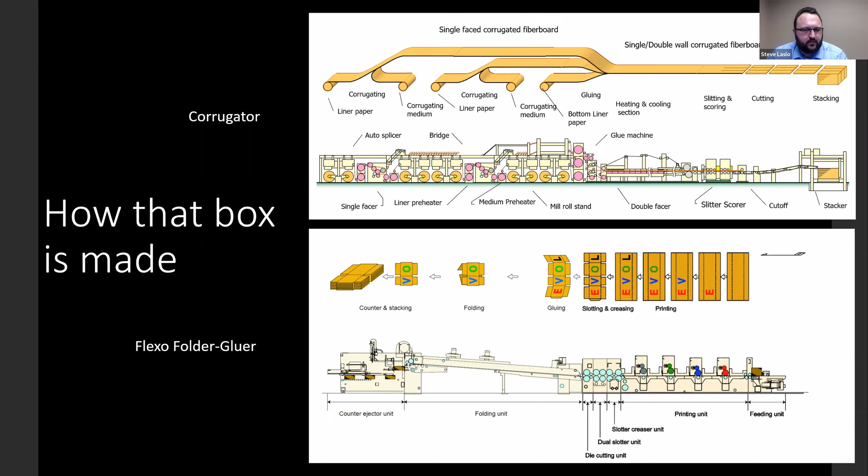So why augmented reality? I guess we got our start working with augmented reality around 2018, I would say, and that was around the time Pokemon Go was very popular. A lot of people in the AR community have probably heard of that. But with the popularity of that, a lot of people started looking at what you could use that same technology for in an industrial environment. So that was kind of where we got our start.

The way that we looked at it differently, perhaps than some others, is we wanted to use it as both an internal and an external resource, and offer that as kind of a product to our customers so that they could benefit from the same kind of internal training resources that we develop to train our team.

Some of the challenges we're thinking about when developing this program: obviously on-the-job training is very expensive and time-consuming. That used to be our primary form of training our field service technicians, and we're in a transition point now where we're trying to use this new technology to help leverage training tools to bring them up to speed a little bit faster and use a little less on-the-job training.

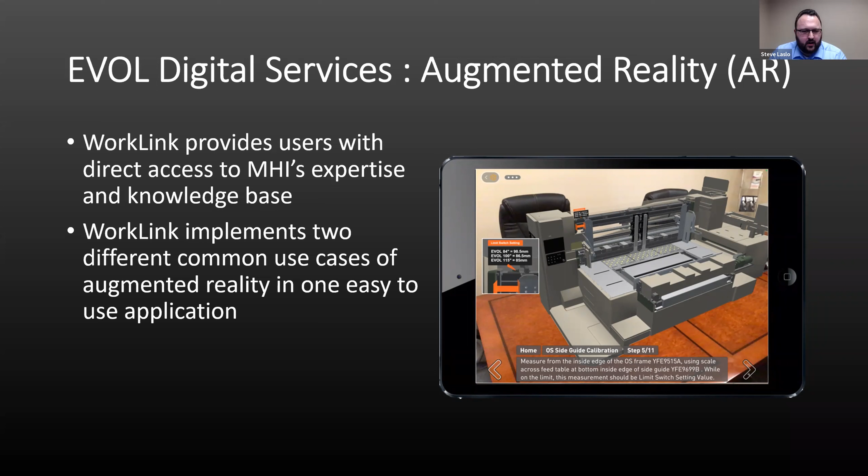Next slide, please. On that WorkLink platform, our customers and field service guys get access to a wide database of expertise and knowledge. It implements the two most popular use cases of augmented reality within the same application: the remote connection, like an augmented reality enhanced FaceTime call sort of functionality, along with the 3D model AR representation of animated procedures.

Next slide. So the remote assist functionality is really important for us because it gives us direct contact with the on-site user, and it shares audio and video and allows us to annotate our instructions to them.

Something you learn if you're at all in customer service in a technical capacity is who you're dealing with over the phone. They may call something a different term than you're used to calling it. There's oftentimes a bit of a communication barrier. So any tools we have that can get us past that difficulty and make it more clear what problem you're experiencing and what checkpoints we should be taking into account right now are valuable. Explaining that visually is much easier than trying to describe to somebody, go to the cabinet on the other side of the machine, look for the red blinking light.

So that's a little bit of background on why we really appreciate the remote assist functionality. Next.

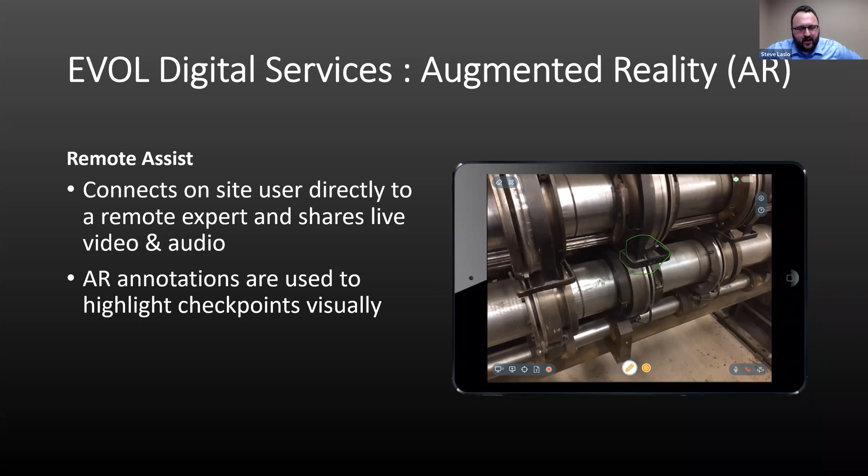As far as work instructions, that's what I think is really the most flashy and impressive part of this. As we continued developing the program, we managed to get the 3D models. When we actually started, we didn't even have the 3D model of our equipment. But as we started to show some signs of success, we were able to farm out some of the older 2D CAD models and have them converted into 3D models so we could import that into the platform and start developing reference materials and step-by-step procedures. The nice thing is it doesn't just explain how to perform a task, it actually animates those instructions, and it really helps the user better understand a much more complicated process if they can see it happening.

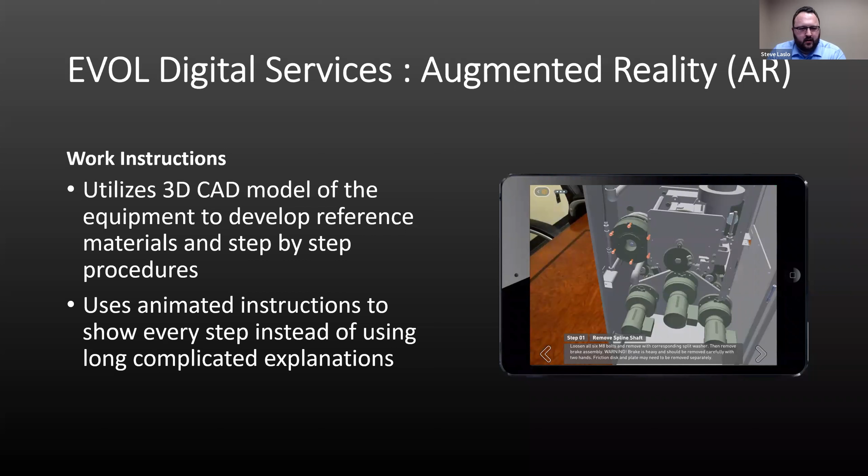So what we first started building is all the limit adjustment procedures and the gap calibration, because those are not particularly difficult to animate. We're not talking about a whole lot of different parts that have to move. We're basically taking previously existing procedures that we had in PDF form and converting them into an AR format, just so we can get them out there and at people's fingertips easily.

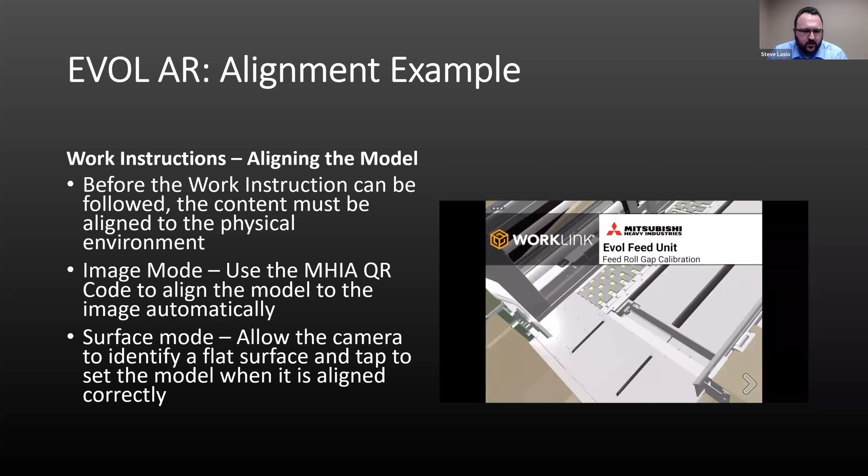First thing they'll do is align the model, and within that you have two different ways of doing that: an image mode and a surface mode. The first part here is going to show image mode, where you have a QR code that automatically places the model. This is the feed unit of our machine. Once you've placed that model, you can follow the instructions and walk around it. Surface mode basically allows the camera to identify the surface and then set the model on that surface once it identifies a flat place for it to position itself. Then you tap the screen to confirm it.

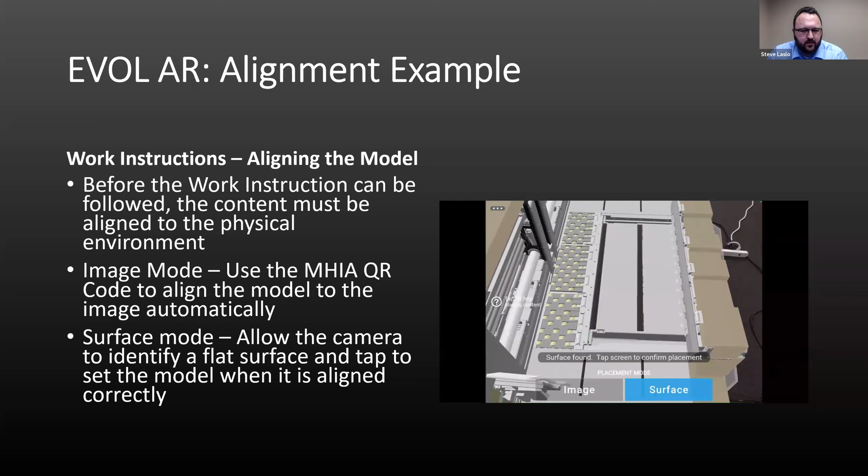So again, what we're doing here is using a smaller scale model of our machine. We focused initially on a classroom training kind of environment. A lot of the newer functionality with augmented reality allows you to use the instructions on the actual equipment in person, but we were a little concerned going into it that there might be potential safety concerns with our customers. We weren't sure, with this being a new technology, how well it would be adopted yet. So we wanted to start with building a classroom training kind of environment tool that can be used.

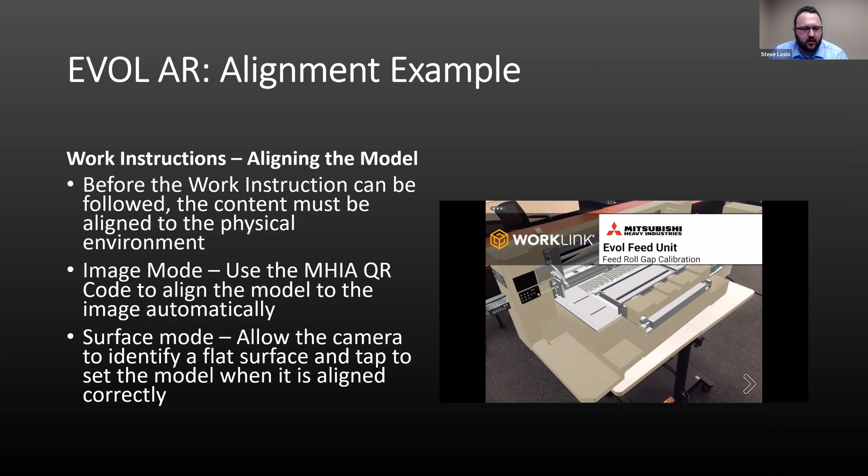Next. I think that's the same slide, sorry.

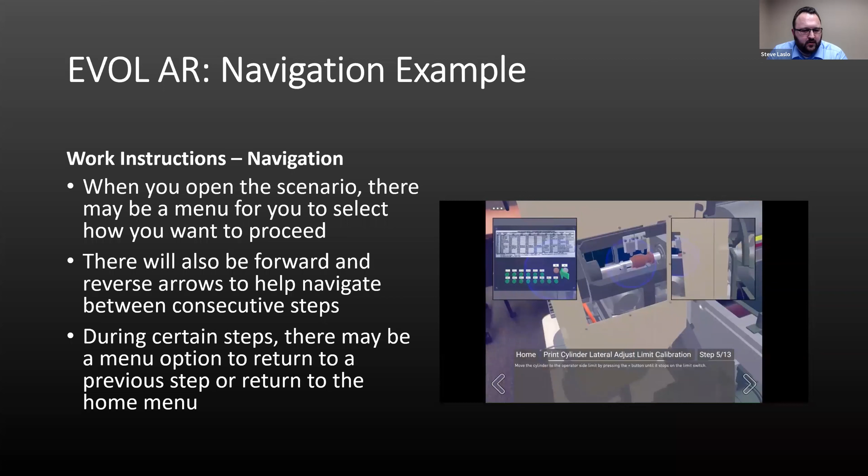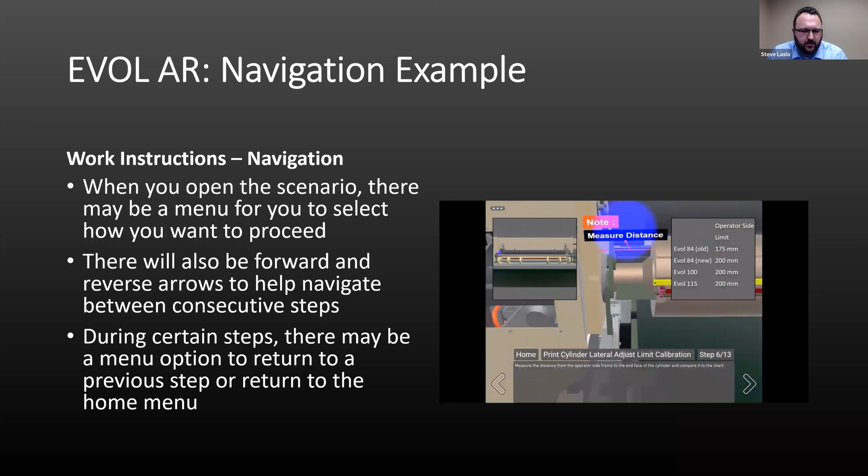There we go. So once you have the model placed, you can use the arrows to navigate back and forth through the steps of the procedure. You'll often have a main menu where you can select different options. So what I'm showing here is our print unit lateral adjustment. As I was saying, these are limit switch adjustments that you need to have the motion stop at a particular location so it doesn't cause mechanical interference between two parts.

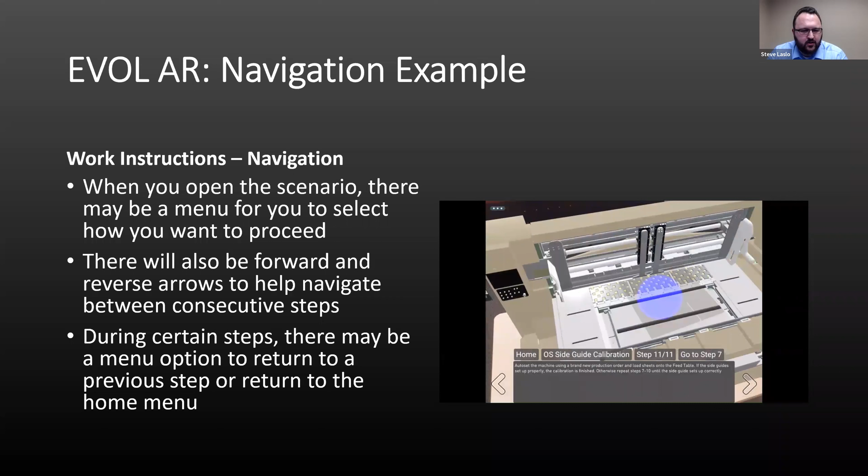So what we can do is use that to demonstrate visually how to adjust that limit switch in the right position. Next.

Within a lot of our procedures, and this is something I really like about the WorkLink specifically, is we have these pop-out sections of the machine that we can animate in a close up, or we can provide a chart.

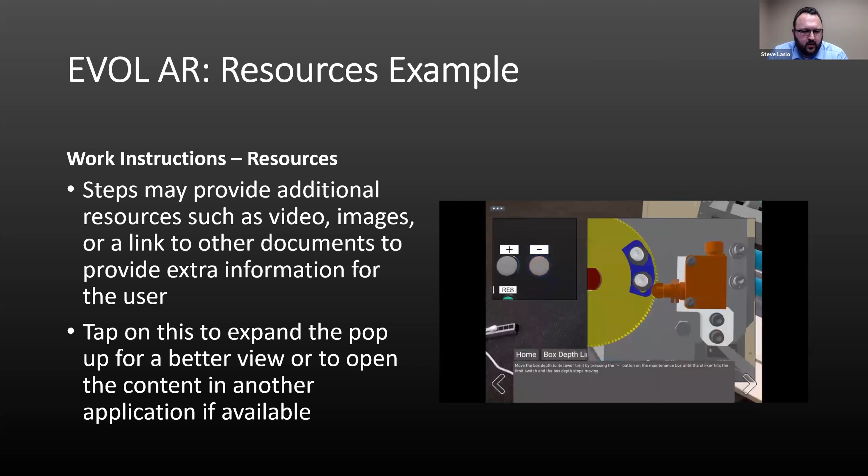With the EVOL platform, we have multiple different size machines, which means it'll handle a variety of box sizes running through the equipment. But that also means the calibration procedure is a little different from one machine to the next. Being able to have a pop-out chart that shows the different measurements depending on the machine type allows us to use one procedure to represent multiple different machines, without having to load in the exact different model of equipment, and move forward developing the procedures without that.

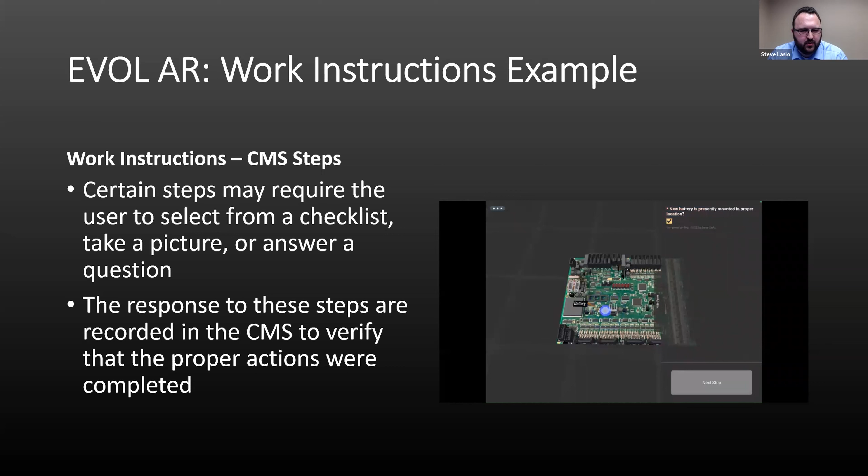Some of these procedures also include what I'm calling CMS steps. I'm not sure of the official term, but it allows you to click a checkbox and record that certain steps were completed. It allows you to remote verify specific tasks were performed. So if you have an approval process for particular procedures, this allows you to give confirmation and take a picture, for example, to show you've completed a certain part of that step before you can move on to the next step of the procedure.

Some of the other menu options let you align the project. Again, if it gets off, use the standalone device mode. What I'm showing here is our counter ejector, the part of the machine that takes the bundles, counts up every box, and ejects a certain number per stack.

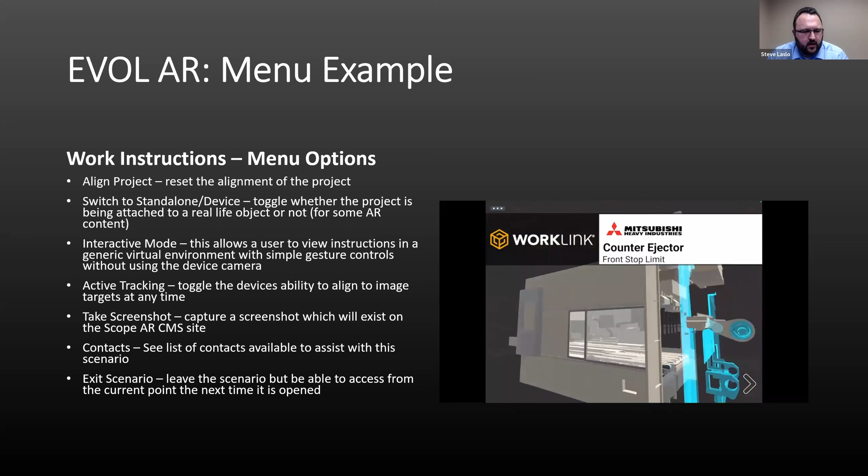You also have the option to go between interactive mode, and that really allows you to take it onto the machine. So what we started with was more of a classroom training environment, and using interactive mode allowed a nice easy transition to actually using the smaller scale model at the machine as a reference material. You can use standard gestures on an iPad or Android tablet to zoom in and out and scroll around.

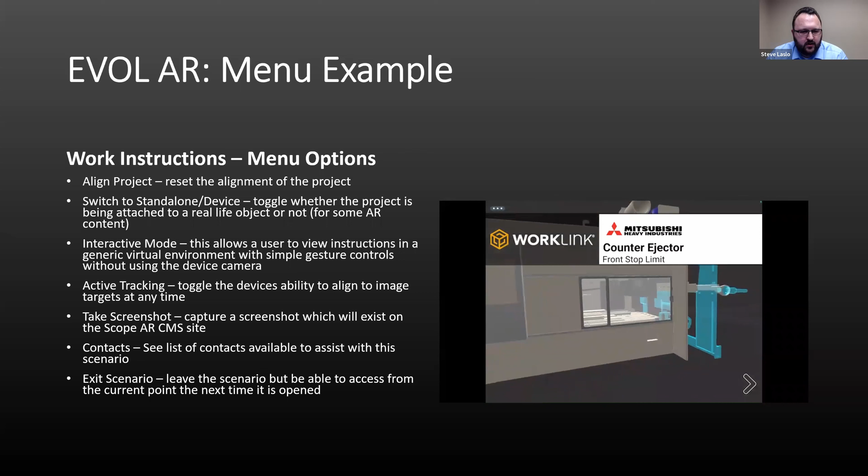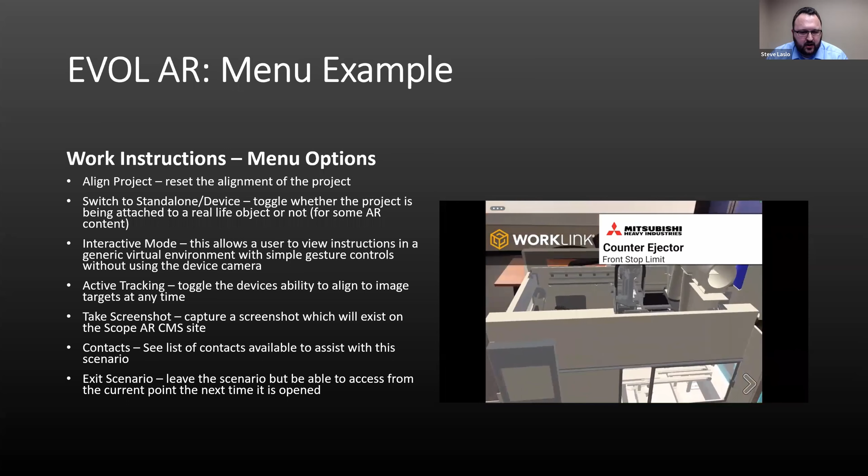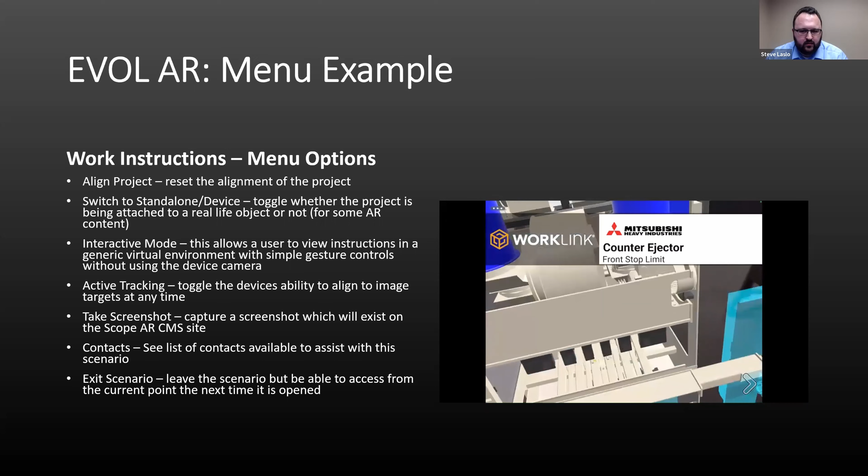That allows you to use it as a more advanced maintenance manual for our equipment, where you can use actual augmented reality, place it on the table, and walk around it. That allows you to use it in a classroom setting, but using interactive mode really lets us use it at the machine without having to scale up the project to full augmented reality instructions on the equipment.

We want our customers to be a little more self-reliant, able to use this as a tool to solve problems before reaching out for customer service. But we also want that when they do need help, they have a quick, easy way to reach out to our customer service team. And we want to standardize the process of all these complicated procedures by capturing a lot of the expertise of our senior workforce, and using that to benefit our new employees.

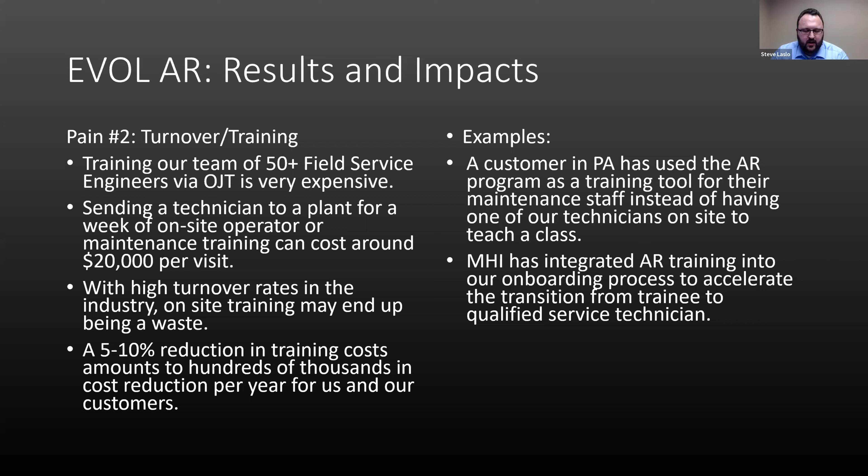In terms of emergency service, that's probably one of the most expensive parts of operating a service business—when preventive maintenance has failed and you have to send somebody on a plane to fly across the country to solve a problem. One example: a customer signed up for our digital service program including the AR platform was having a problem with their folding rails on the EVOL. By providing a procedure for them to perform that task themselves—historically a required service visit because it's fairly complicated for a maintenance technician without experience—they were able to save the cost of flying a technician out to the plant. That alone pays for the program subscription.

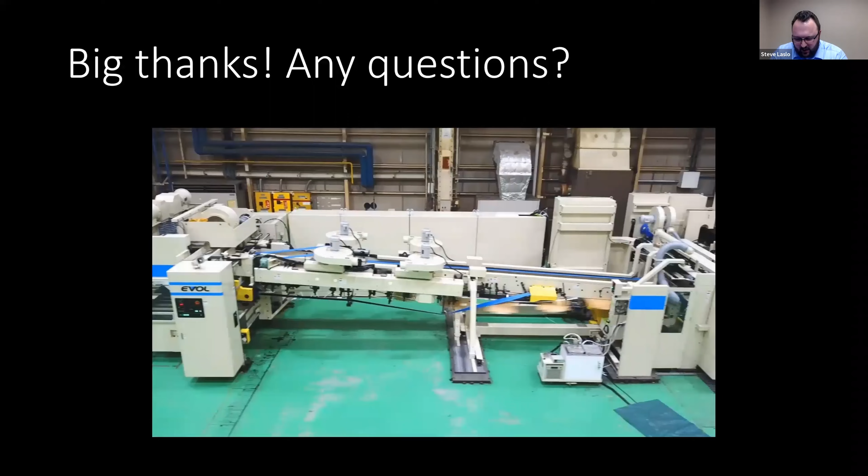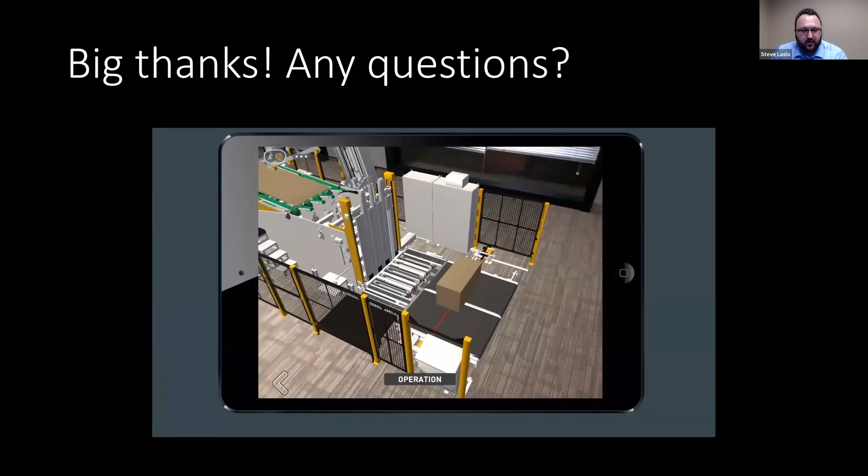That's a quick overview of our journey from a small proof of concept into a much more fleshed out program. We're still developing more content, and we have a lot of ideas of where we're headed with this program in the future.

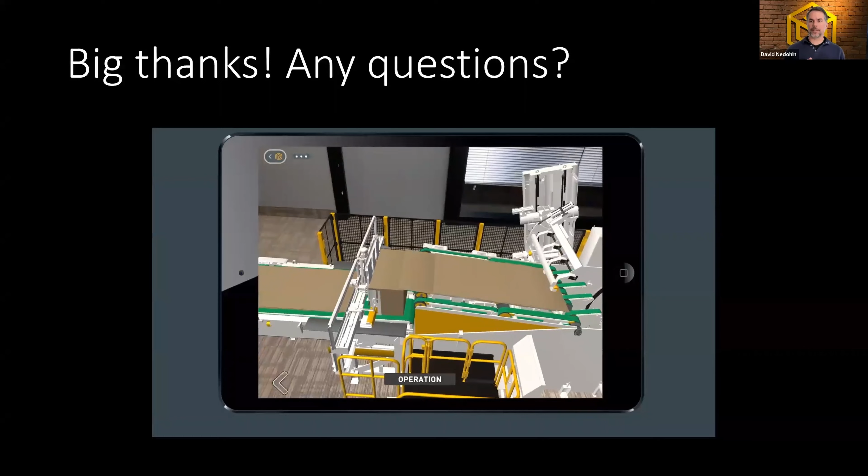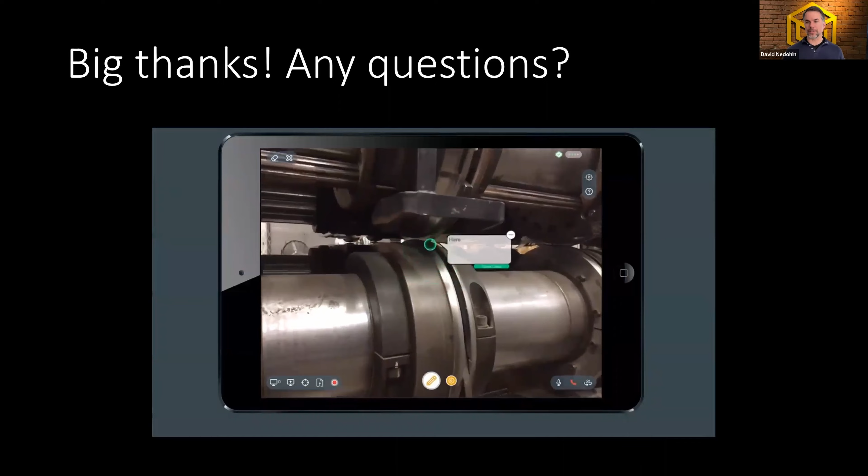This was great to see the evolution in terms of where you started, what the vision was, some of the use cases, and the costs—obviously the importance of those to your organization. I think the use cases you pointed out are universal. When you mention the cost of training somebody, it's something every one of our customers, and probably everybody on this call, is experiencing in one way or another.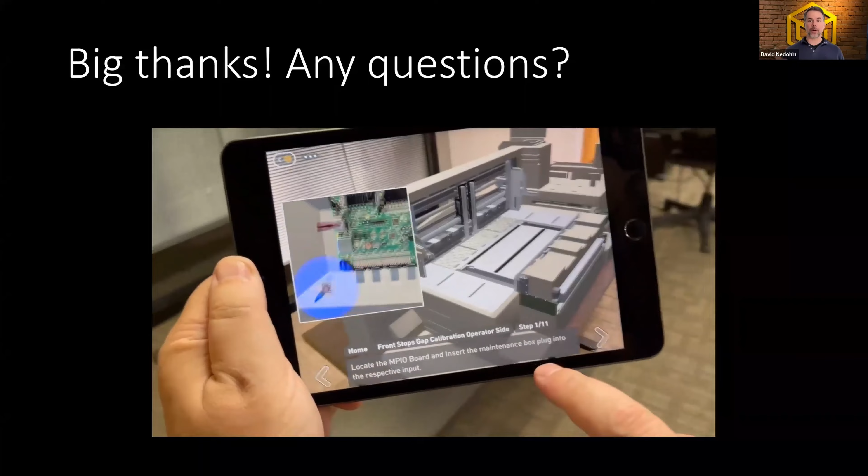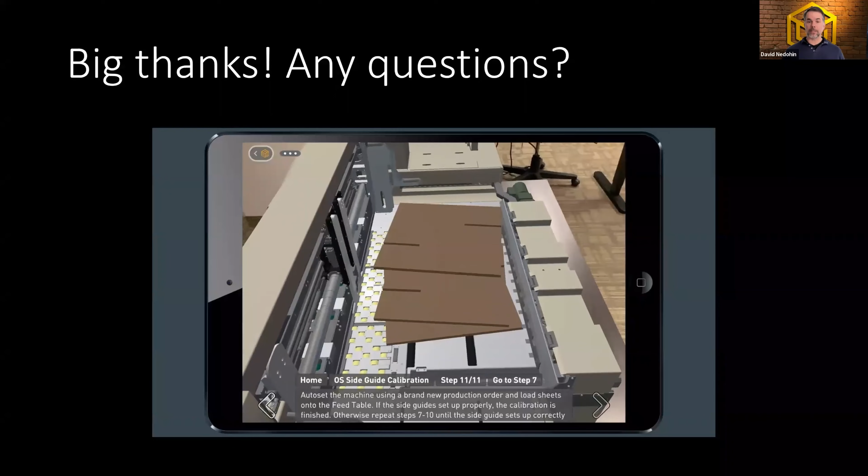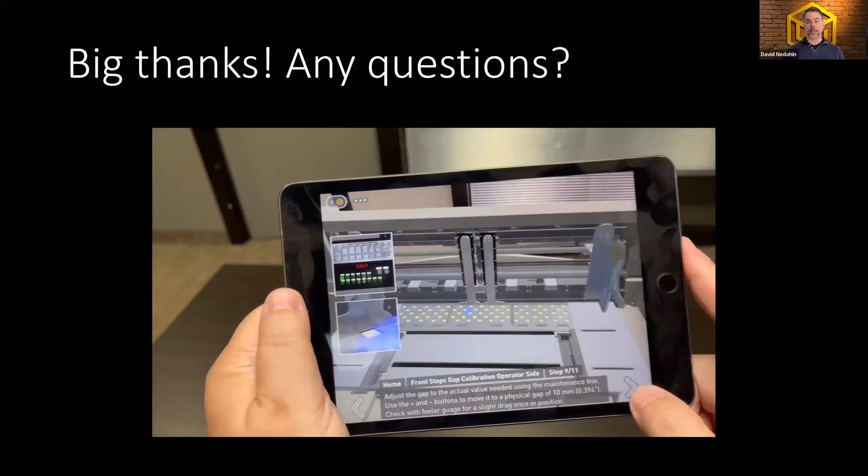We had one customer share that over a year they trained 3,000 employees, and by the end of the year they were net positive only 300 employees. When you think about the cost of training remote employees, flying them to different locations, needing equipment in their hands that isn't always available—how do you do that? There are studies recently showing that cost is somewhere in the range of $25,000 per employee to train. So extremely, extremely expensive problem. I'm sure that's something you thought a lot about in terms of starting points and the impact you might have.